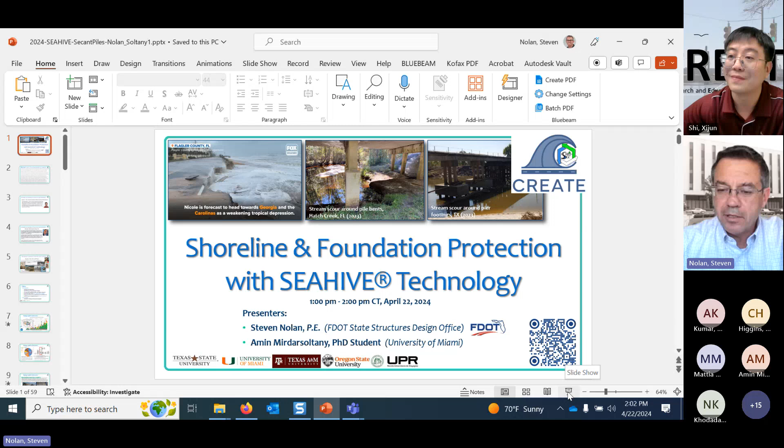So we're going to talk about shoreline protection and some foundation protection as well as it relates specifically to the C.R.E.A.T.E UTC project that's going on at Texas State. So as I was introduced, I work at Florida Department of Transportation. We have an innovative materials structures initiative that I've been leading for about the last 6 or 7 years. And so within that, we look at specific materials, FRP, UHPC. We're also looking at different structural forms. And so this is where the SEAHIVE unit comes in, something that I looked at originally, and then we passed it on to the University of Miami to develop, and now we're bringing in Texas State to look at some expanded applications.

So I hope you enjoy the presentation today, and a lot of it is background and motivation and generating thoughts and ideas about how to best combine technologies and structural morphology. So hopefully you'll get something good out of it. I can get my slides to advance. So we'll start, and after I'm completed, with a pre-recorded video.

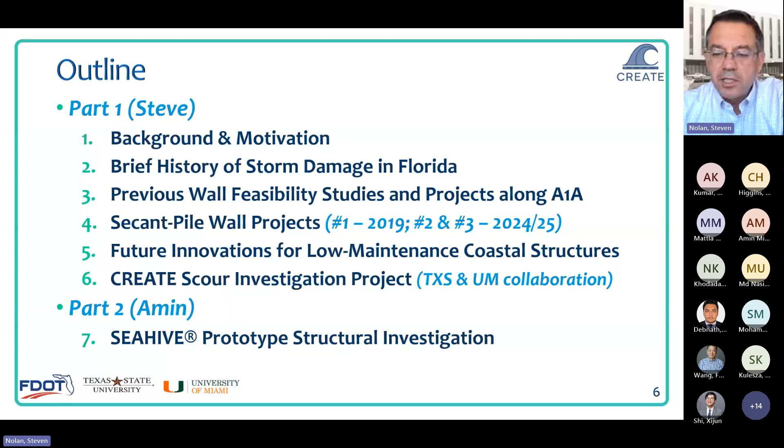Then we'll dig into some of the exciting developments that we're investigating, and we'll finish off with just touching on the initial scour investigation that's being conducted right now in Texas, and hopefully we'll have a follow-up presentation on that by the folks there later on in the year or early next year. And then at the end, we'll dig into some of the more specific structural investigations that have been conducted at the University of Miami that Amin's in charge of leading. And hopefully we'll have plenty of time for questions at the end.

But it's always good to ask why. Why are we doing any of this? And it's pretty obvious that the costs of these extreme events and moderate events are increasing. That's a factor of increased density of development along the coast, and then increased severity or frequency or both of storms and other weather-related conditions.

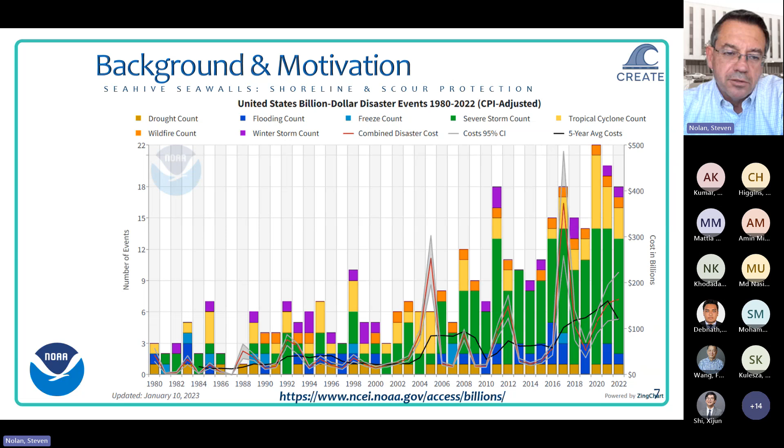And typically you get cyclic peaks and lows. It seems like 8 to 10 year cycles, and we seem to be in the middle of another one here. But if you look at the last 25 years, the cost has just grown significantly for the damage that's incurred as a result of some of these storms or floods or tropical cyclones. And as you'll see, a lot of it is related to water damage, whether that's from wave action, stream flow, or other related hydraulic events.

This map from 2022 shows the locations of all the different kinds of hazard disasters that have occurred. Should be pretty obvious what's most significant in what region of the country. In Florida, we're susceptible to hurricanes mostly, at least at this point.

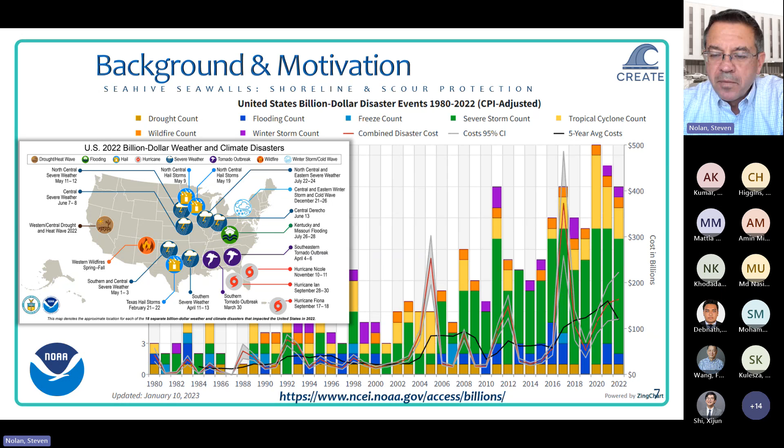So if we look nationally in the US at bridge failures or causes of bridge failures, at least half, and sometimes some studies quite a bit more, are hydraulic related. And so that's typically the result of scour or undermining of the foundations.

Looking a little more broadly, this study or survey by Zhang et al. looked at both the US and China and found similar trends there with the hydraulic events creating the majority of the damage to existing infrastructure and bridges more specifically.

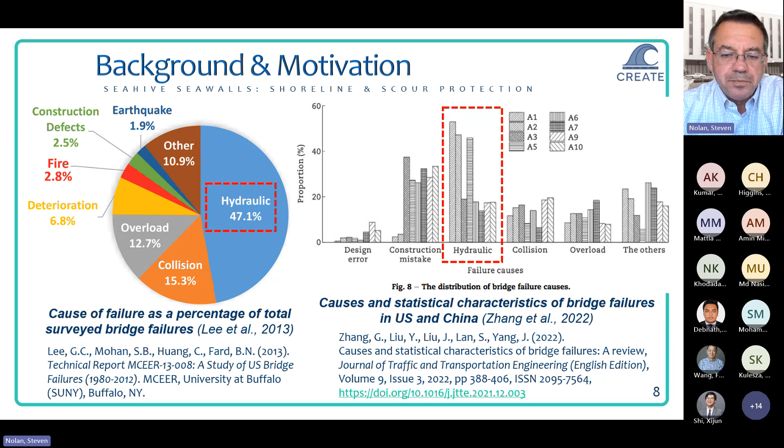So this was something just from a week and a half ago that caught my attention. When we look specifically at the coast or coastal infrastructure, highways in the case of A1A that we're going to be talking about today, the natural protection is typically the sand dunes, which are quite often removed during urban development for improvement of views or whatever. And so as we've grown to appreciate the advantages of these natural defenses, we've invested significant resources in rebuilding or renourishing the beaches and sand dunes periodically after a storm event.

But it's always, it seems, a never-ending battle in that the sand never returns in full back to the shoreline during the calmer periods, and so we're continually at risk of more and more damage. And that could be a function of a number of factors, whether that's increased severity of storm activity, whether that's a rising mean sea level. All these things sort of play a bit of a part into that.

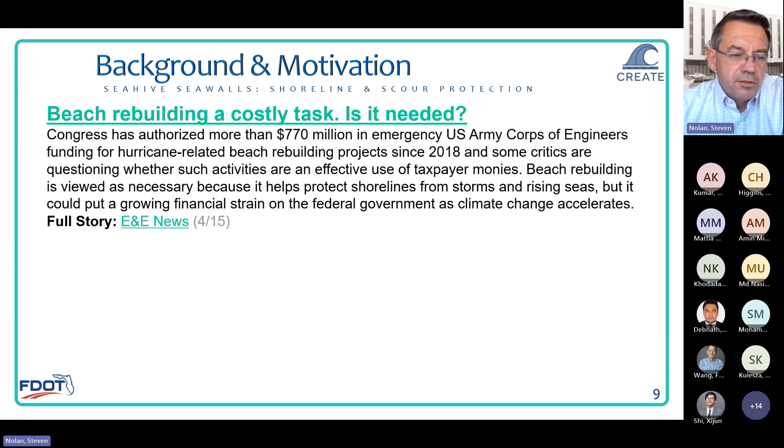And policy decisions too play into that for development along the coast, and insurance and reinsurance incentives. So it's a very complicated issue as to what the cause and potentially what the solution is. As engineers, we're tasked with trying to provide safe and efficient and effective infrastructure for the community, and so that's what we're focusing on here. Whether you're supportive of protective measures along the coastline or not, that can obviously be controversial in some communities.

But if we look at the northeast counties of Florida, St. Johns, Flagler, and Volusia, they've been subjected to quite a few storms in the last 20-25 years that's resulted in significant damage, and we seem to be replacing or repairing the highway every decade or so due to a major event. So most recently with Hurricane Nicole, it's not just the highways now that are at risk, and some of these large condominium complexes that are adjacent to the coast are starting to be undermined. You can see the piles hanging out at the bottom of that significant structure there.

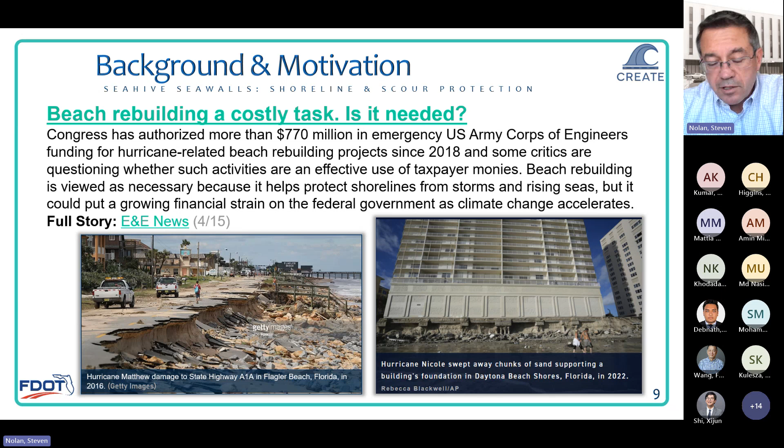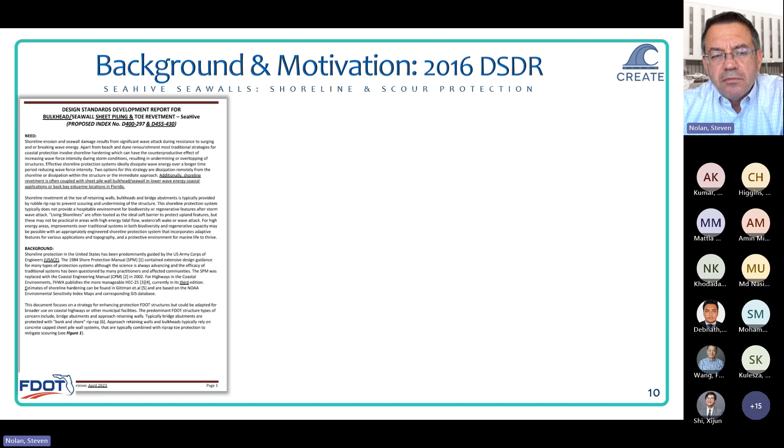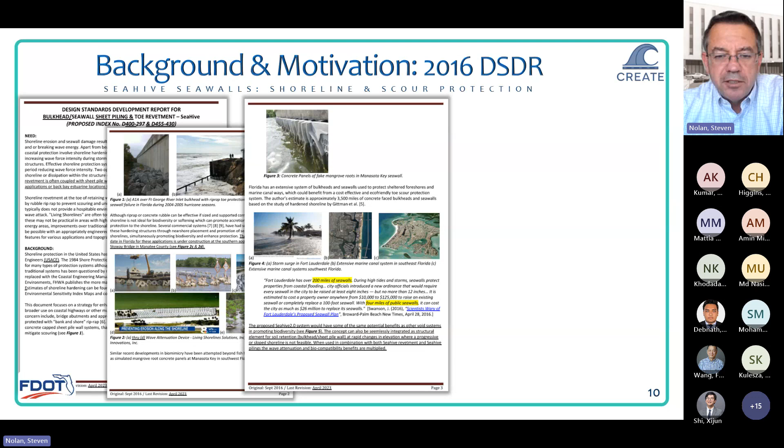So it seems like we're going to need some solutions to both balance the needs of the community for access and use of the natural resource of the beach, plus protection of infrastructure until we decide whether to retreat or some other activity. But we started looking at different protective measures back in 2016 and developed this what we call a design standard development report in the department. It's just the initial seed idea phase and gathering information.

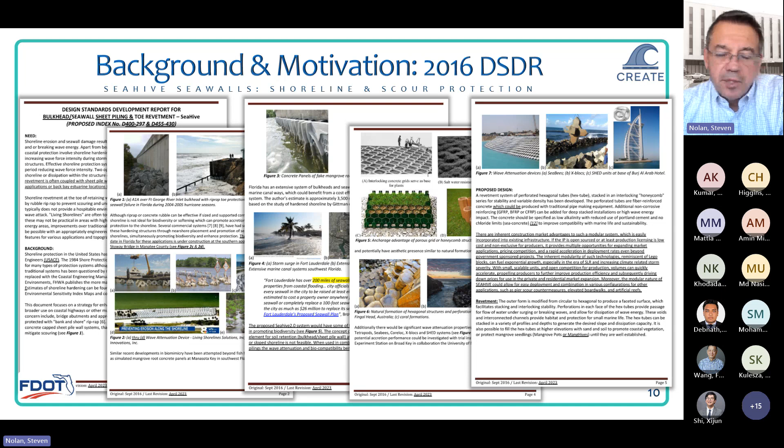There's quite a lot of attempts and different products out in the world that have been used over the years, and some of those work very well. Most of them are all proprietary and restrictive in their use, and none of them really seemed to fit the need of what we needed as far as scour protection for bridge abutments, retaining walls, and potentially intermediate piers and piles. So we sort of settled on this shape of the hexagon just because of the structural efficiency of it and the adaptability, like an interlock.

We looked at the potential for it being a substitute long term for rubble riprap. That's the go-to method of shoreline protection. The challenge in Florida is that we don't have heavy density rock. We have a lot of lime rock, which can be pretty robust, but it doesn't have the weight that sometimes is required with these large energy installations near the coastline. And so we're importing granite from Nova Scotia and maybe from Georgia.

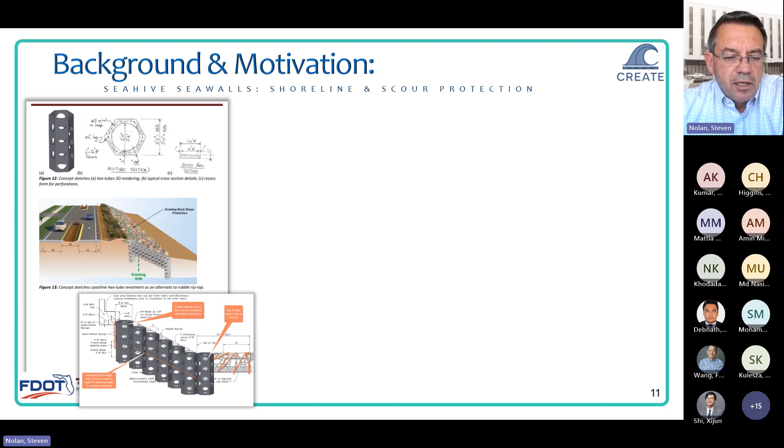And so that's not an insignificant cost. And so we're looking at some sort of modular system potentially that could replace that, be a little more efficient, both environmentally and structurally, and adaptable in the future. And so here's an example of where we would normally have a rubble riprap abutment and potential use of different hex-shaped modular structures to protect that.

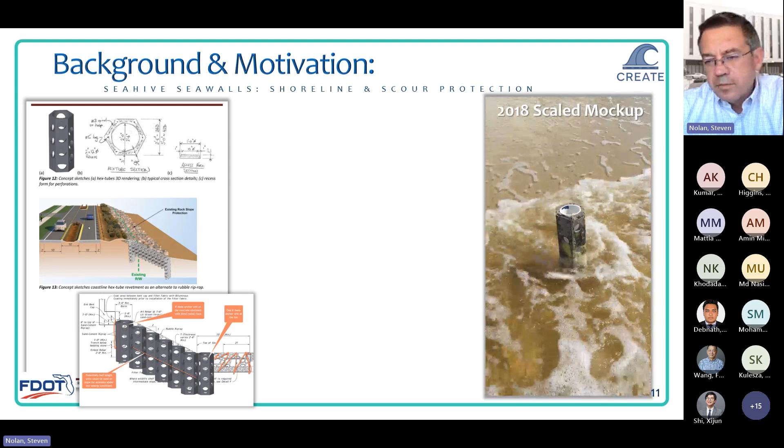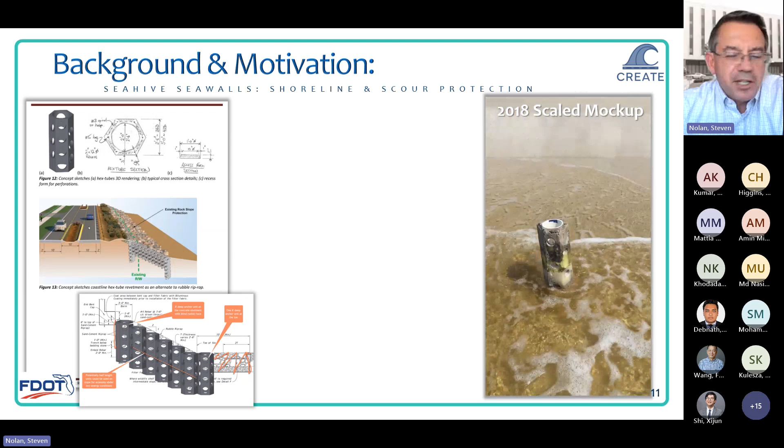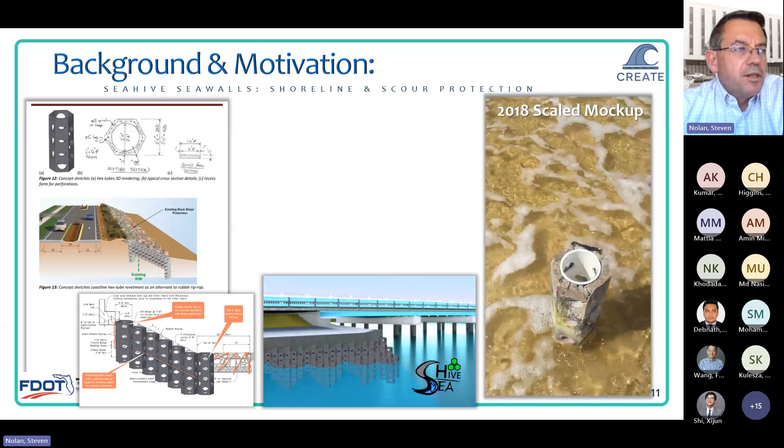So here's just a little scale mock-up that I built back in 2018, just as a concept, to see how the water flowed around it. Nothing very scientific about it, but it was a fun project just to see if this was something that was really worthwhile and practical. We had worked with University of Miami on a project looking at very durable materials, FRP specifically.

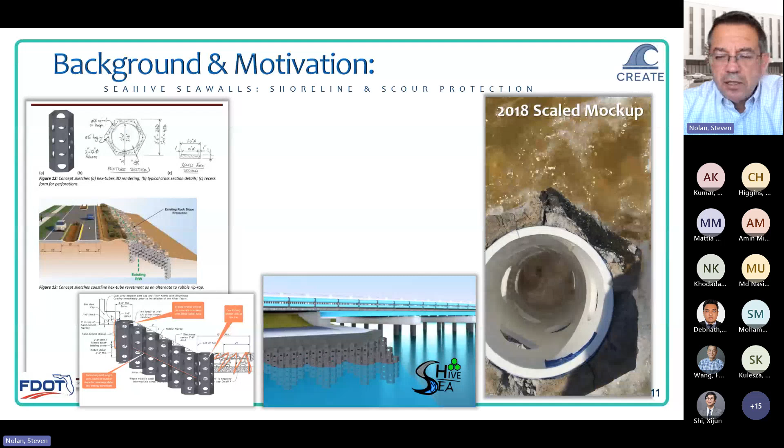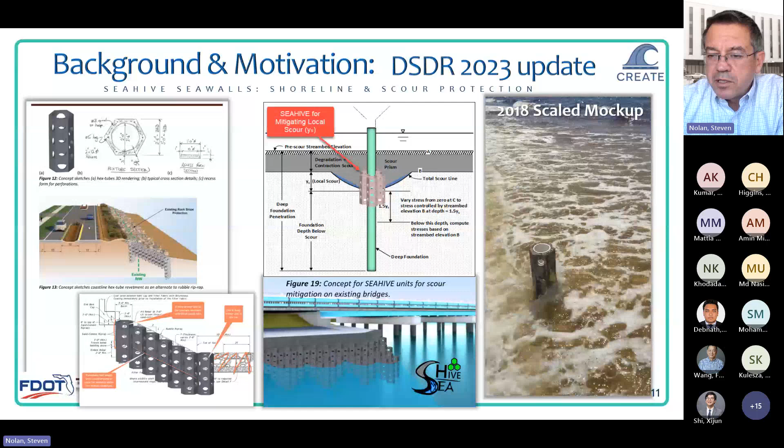And so as a follow-up to that project, we looked at some other adaptions that could be utilized in the future. And then most recently, we started to look at the scour of bridge piles and bridge piers, trying to develop something that might be capable of retrofitting an existing bridge to mitigate scour. So we're very early in that development phase, but you'll see as we get through this presentation a little bit more of what's been done to date.

So focusing in on Flagler County, after some significant storm damage, we invested money in hardening the right-of-way of the coastal highway. We didn't touch the beach and toe of the sand dunes, although they had been removed by the hurricane. This was motivated by Hurricane Matthew in 2016. As you will see, we've been looking at it for quite a while. It seemed to be a continual problem.

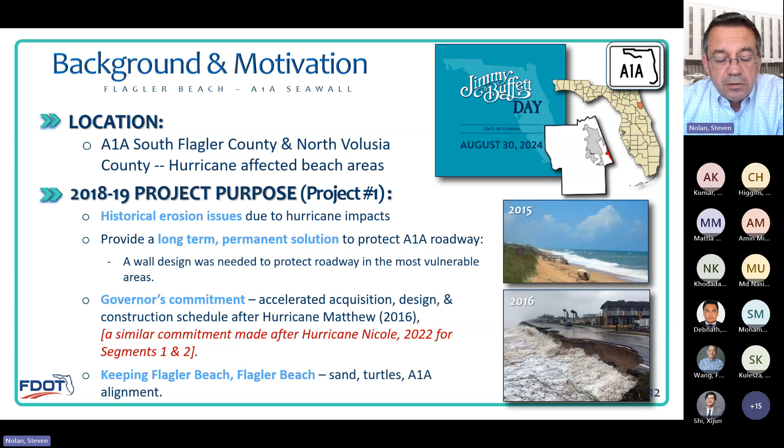Flagler County did not have a recurring contract with the Army Corps of Engineers for renourishment of their beaches, so that could have been part of the problem. But there's always a concern with any system of disrupting the natural environment, so there's always concerns about what effect this will have on sea turtle nesting and other habitat.

So there was a 1 mile section we will call segment 3 that was the most vulnerable to scour and had the most damage in the past. And so that's the section we initially focused on. There is a section to the south, segment 2, the majority of which had a federal renourishment project planned, and there were a lot of technical issues with getting rights of way to do that work. And so it's been held up. I think it's just about to start.

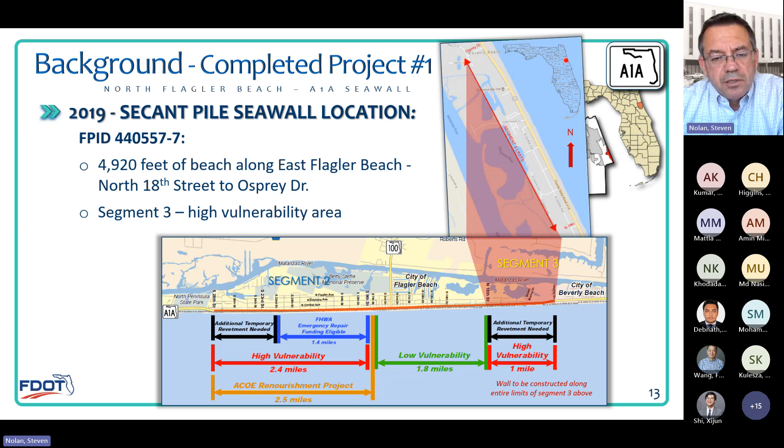It's been like 5 years, and that is indicative of some of the challenges if you're going to rely on a renourishment program. You need to have all the agreements in place to be able to do that and reliably come back after a severe event to maintain protection.

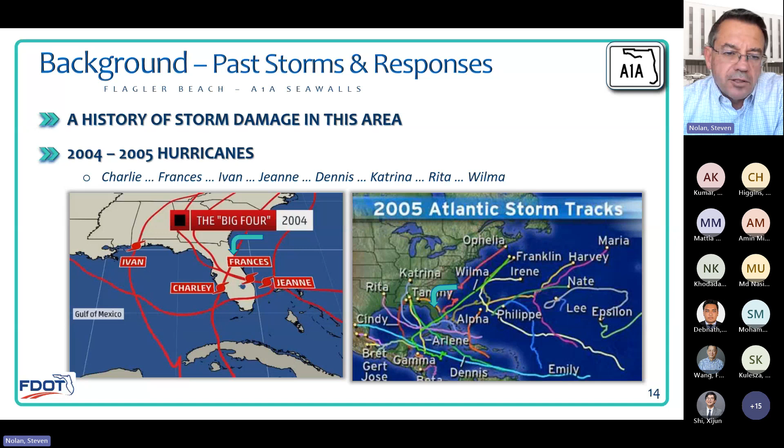So going back to the beginning of this century, we had a pretty severe storm season in 2004, 2005. 2004 was worse for Florida than 2005. That was Katrina. But during that period, there was significant erosion along the coast and damage to Highway A1A.

I don't know if you can hear that background noise, but I hope it doesn't bother you too much. I have a landscaper outside right now.

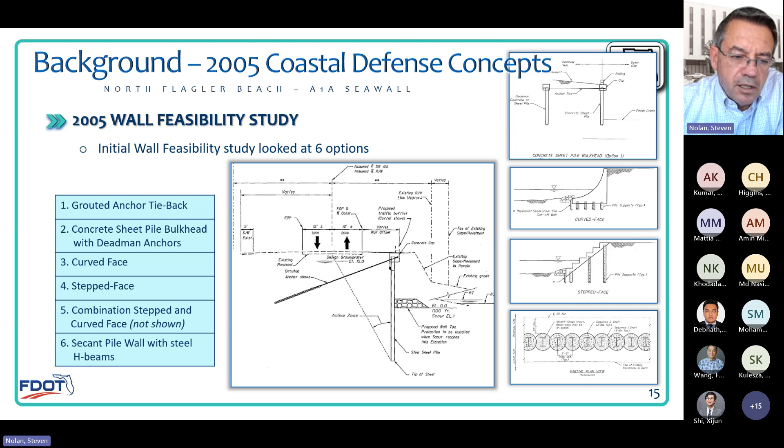We looked at 6 different options for protecting the shoulder of the highway there, just behind the sand dunes. All of them pretty much traditional retaining wall systems. The secant pile wall was really the last one; the building industry is very familiar with it, but we hadn't used it a lot in civil infrastructure construction. And that particular system they looked at then had a steel H pile in the middle for reinforcement, which ended up not being the reinforcing option that we chose.

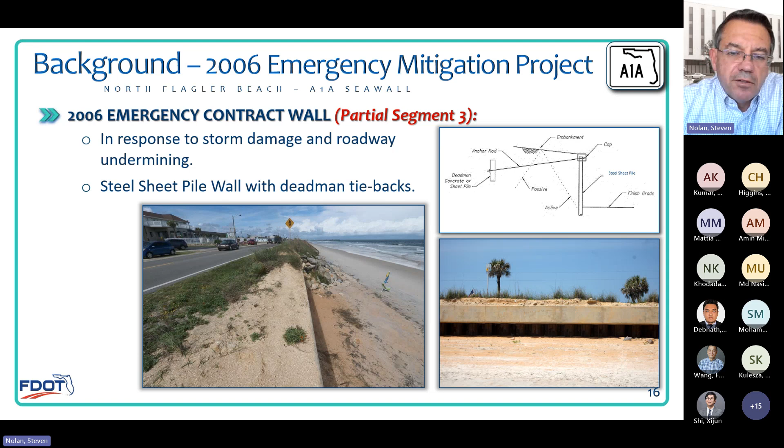Because of the severity of the storm season in 2005, there was an emergency contract, so they went and built a short section of steel sheet pile wall with concrete cap, tied back. You can see there in the top right. This was I presume intended to be a somewhat temporary solution, 20, 25 years. I don't really know the full details and the motivation, but it provided a great opportunity for us to go back and look at the durability of sheet piles in this type of environment, to see if it was viable to design these systems with sacrificial thickness.

It was quite surprising, though, the amount of deterioration that we saw in the first 7 years. Partially, I believe, because the abrasion of the sand accelerates the corrosion beyond just the concerns with the constant wetting and drying in the chloride environment. And so we have corrosion rates established for aggressive environments, but they're not really anticipating this type of application.

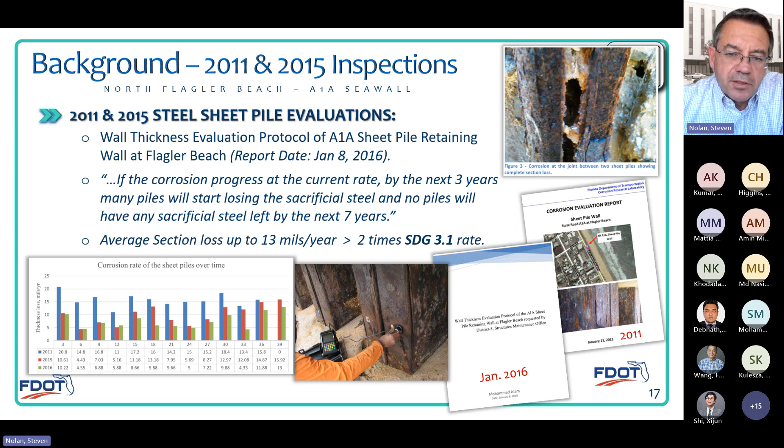And what we found was the corrosion rates locally were more than twice the worst case we predicted in the past. So the microenvironment is very critical to the use of some of that guidance that's out there in our structures manual and other engineering documents.

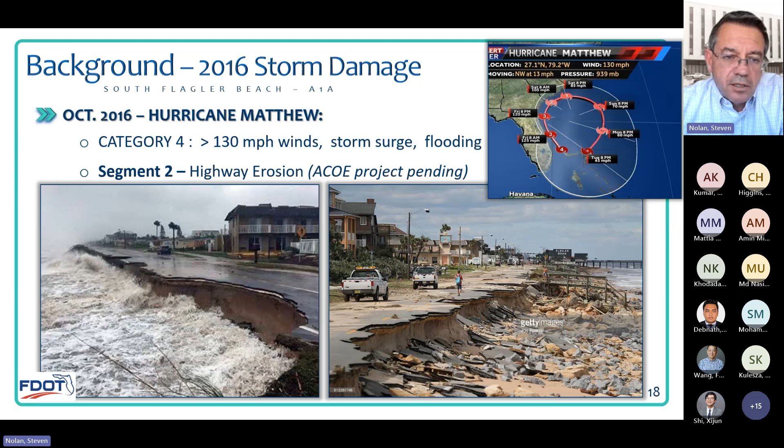So moving ahead 10 years, Hurricane Matthew came through. That was the next biggest storm, and it did a lot of damage along the coast. As you can see there, some pretty impressive erosion of the highway, significant disruption to the community. This is the main access route along that section of the coast for businesses and evacuation. So it was a concern to the state of Florida that this seemed to be occurring more frequently.

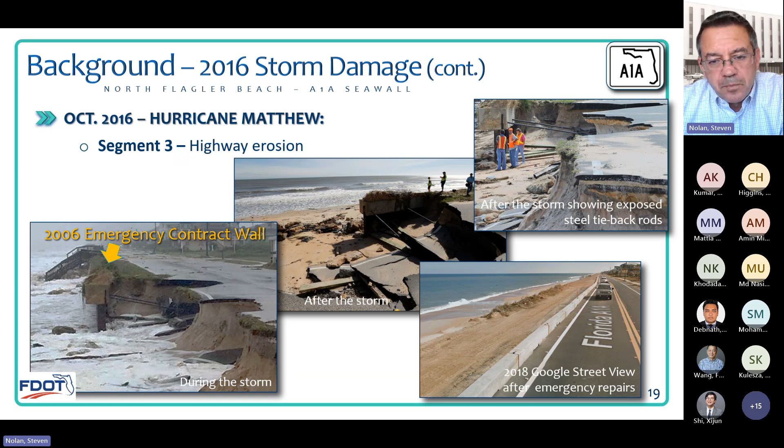And if you look back at that steel sheet pile wall that we talked about earlier, you can see there that it's totally exposed at the end, and essentially that had to be removed. So the project that was designed was a secant pile wall for segment. It says segment 1, but I think it's actually segment 3. And segment 2 was unprotected, which was a little bit to the south.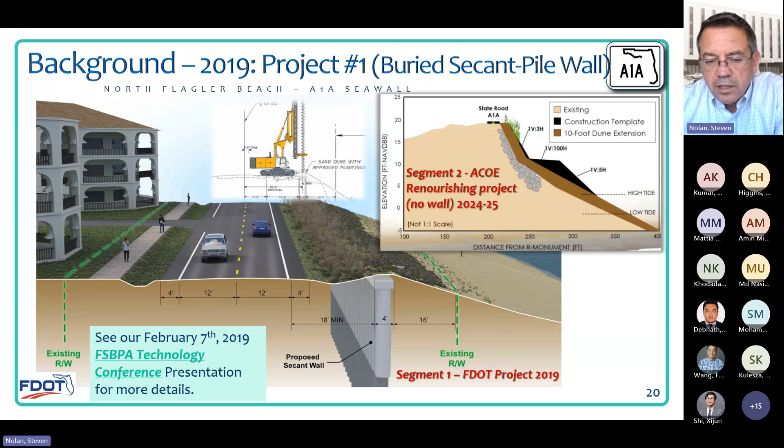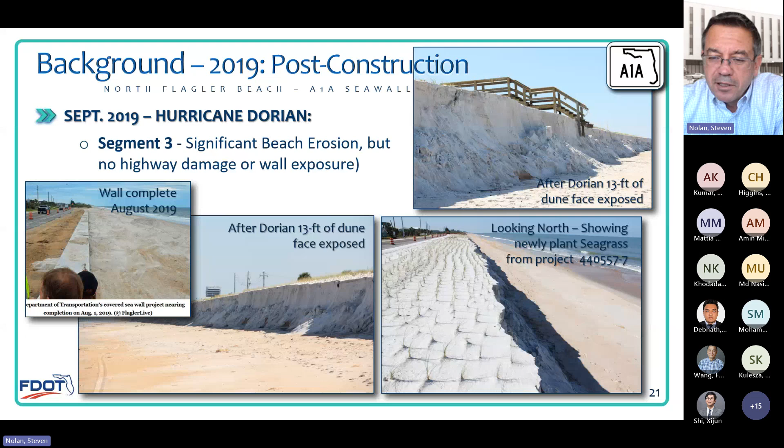And so we had like a 1 mile secant pile wall that was eventually buried by sand dune and revegetated, which we presented in the 2019 Florida Shore and Beach Protection Association tech conference in St. Augustine. So there's quite a few details on that available there. The project was finished in, I think, August. And then in September, we had Hurricane Dorian come through and erode most of the sand that we had placed or replaced after completion of the project, probably 75%.

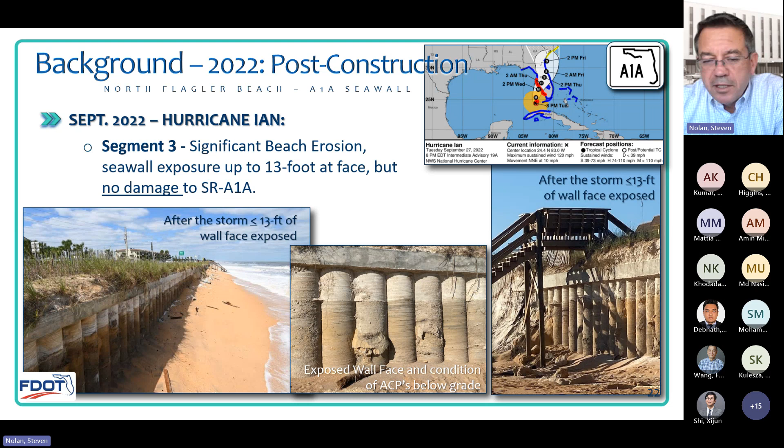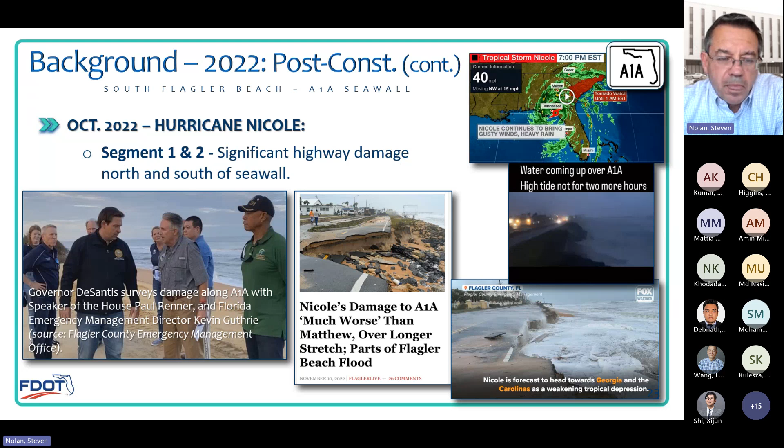There was another storm in 2020, not as significant, and then in '22 we had Hurricane Ian that really did some damage along that coast, but the secant pile wall stood up well. You can see all the vegetated sand dunes on top remained in place, and no damage to the highway. The section south of that that wasn't hardened with the secant pile wall had significant damage again. Looks very familiar to the previous scenarios, and so the state was charged with expanding that protection that we currently provided.

Here's some more photos. Hurricane Nicole, that was a month later. It didn't necessarily scour any more sand away from the base of the wall by the end of the storm, but it did damage areas to the north even more significantly, where there was no protection. So the wall did its job and allowed the county to go back and replenish with sand once they got the permits. But as I said, that takes quite a while, and it's not going to happen probably for another couple of years.

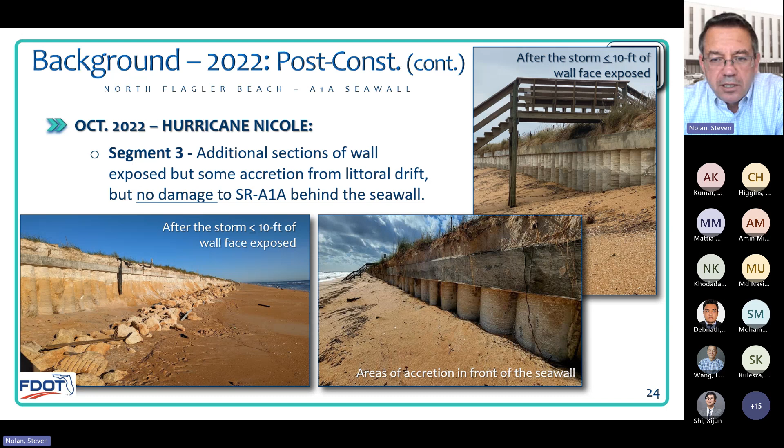When we go back, all this rubble that you see at the toe of the wall there, that wasn't part of the last project, that was previous attempts to protect the highway. And so that sort of obstructs what remaining beach there is. And so as part of the designs we don't use rubble as toe scour protection, just because of the residual concerns.

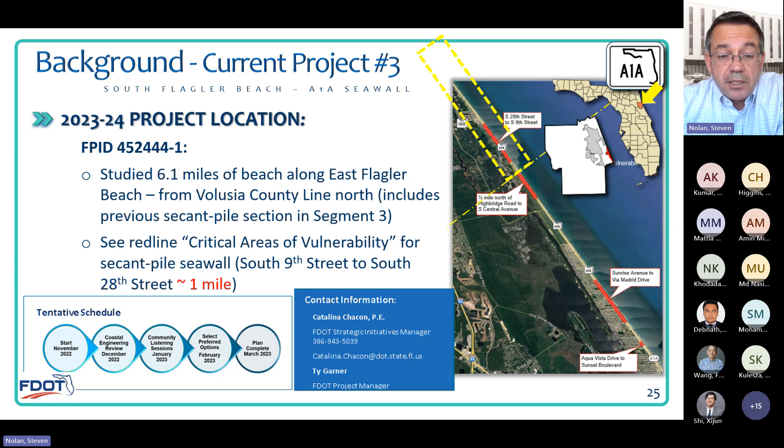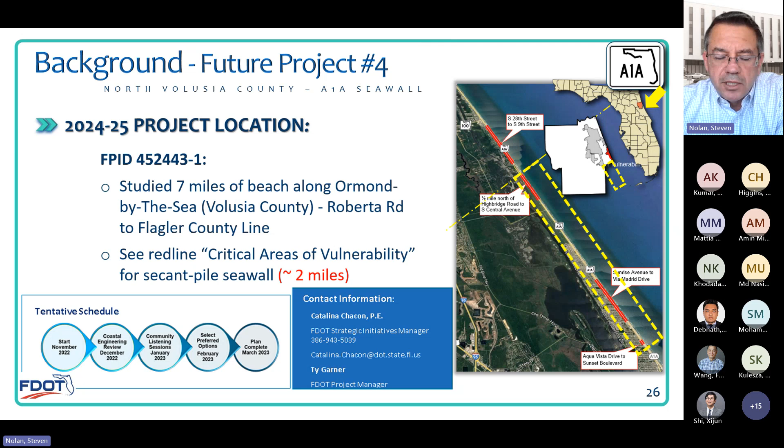So looking at these projects for this year and next year, it's about a mile to the south of the first project, which we call project number 3. Project 2 was the Army Corps of Engineers. And so this is completed design, and is about to start construction. And then there's a section to the south of the county line there in Volusia County. It's about twice the length of coast, 2 specific areas with a similar system, and we'll look at some of the details. They both use secant pile walls.

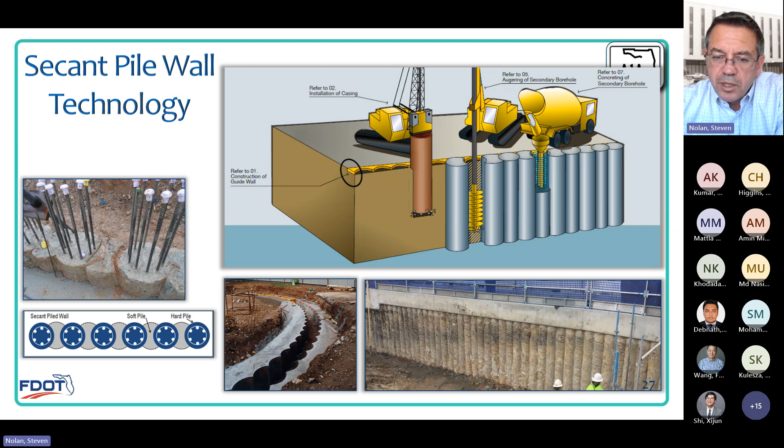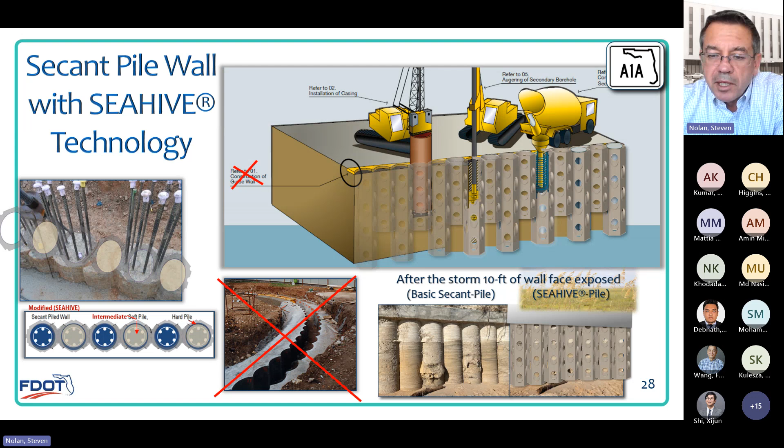This is the original technology that came from the building industry that was utilized effectively in the first project. There's plenty of information out there that you can access. So this is a concept we're looking at for improving the efficiency and the economy of the secant pile wall by incorporating precast casings in the hexagon form, and potentially supplementing that with units at the toe to reduce the amount of scour or recharge the sand as the storm encroaches on the wall.

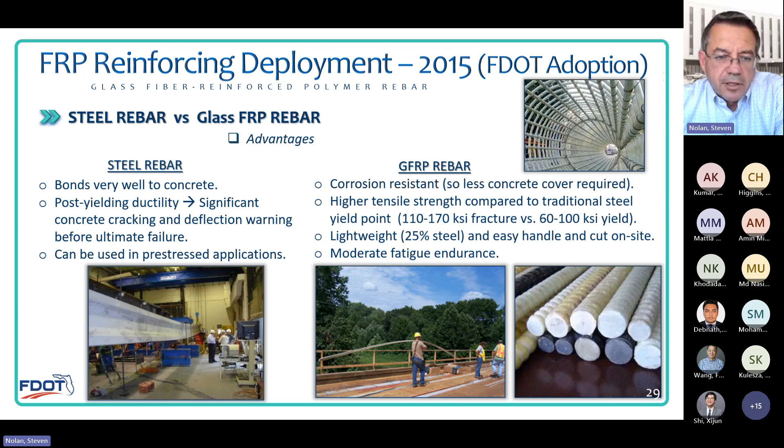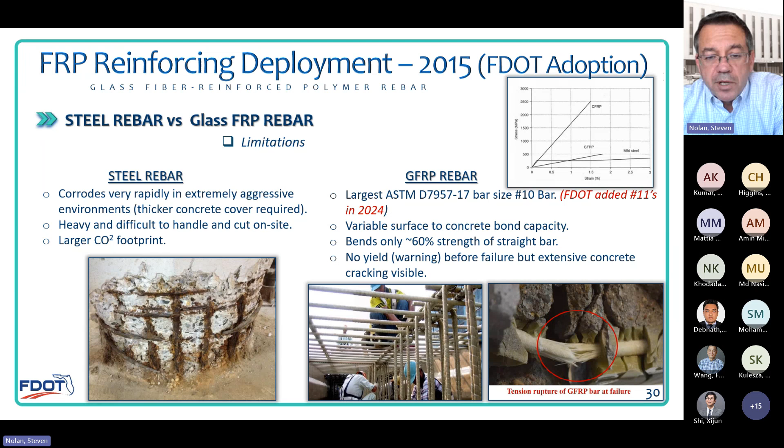Originally, these projects were envisioned with steel rebar, but as the department moved towards the use of FRP, we were able to incorporate glass rebar, GFRP rebar for short, into those projects. There are significant advantages of both listed on the screen there, but the main motivation really is durability and to eliminate corrosion. There are limitations also with both steel and GFRP, and so being able to work with those limitations is part of what we do.

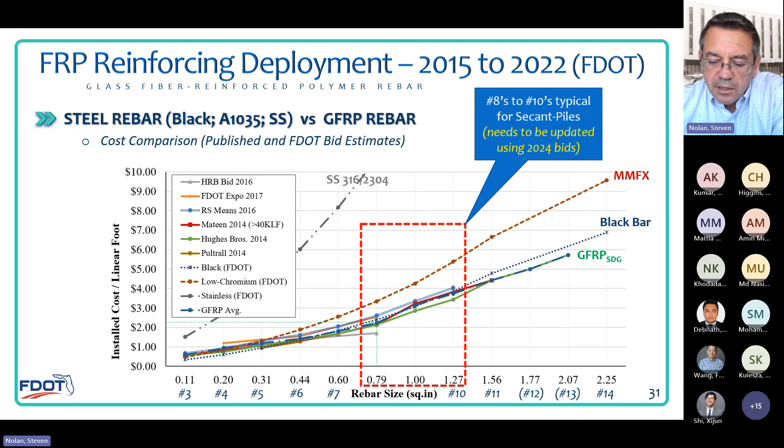The costs are more, let's say, for FRP than they are for plain carbon steel. Those cost differentials tend to reduce as you get to more expensive alloys that are more corrosion resistant, and significantly less than stainless steel, which would be similar in its durability performance. But what we are finding is that as you get to larger and larger bars, the cost differential tends to go away, and so we're also looking at this for other applications.

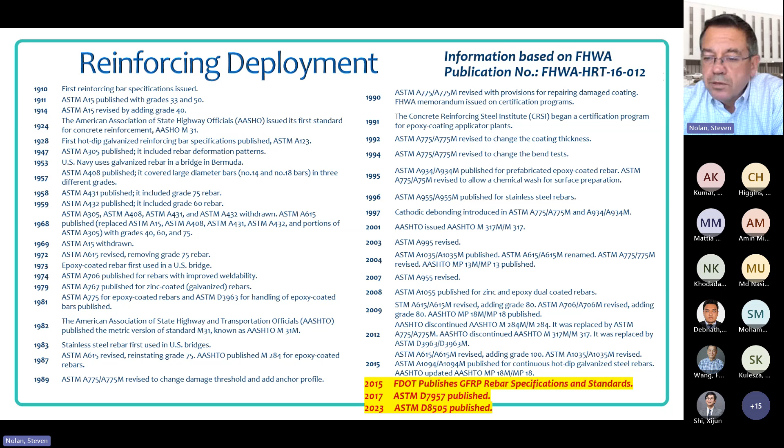It really only got approval in 2017 under ASTM, and there was an update last year to a higher modulus specification, which adds some advantages to us to improve the economy of these structural systems. So back when we were looking at the first project, those were the costs of the steel rebar versus the GFRP.

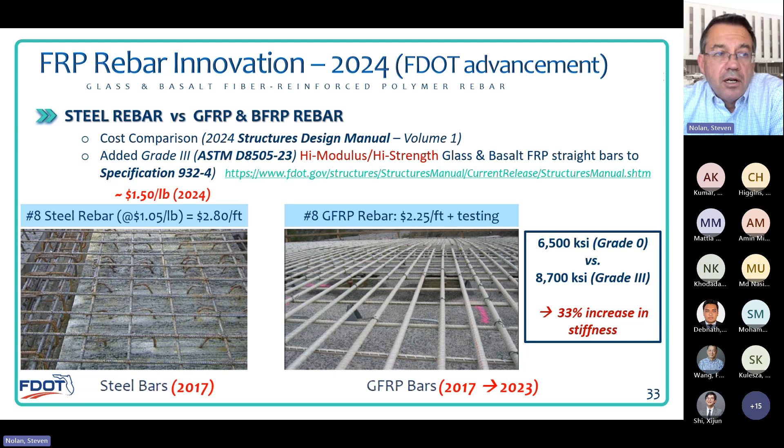With today's market limitations, the cost of steel rebar has increased significantly. It fluctuates quite a lot, though; this is an in-place cost from the contractor. That's always a moving target. But the important thing that did happen between the first project and this next project was the release of a high modulus, high strength specification. So we're able to reduce the volume of GFRP rebar.

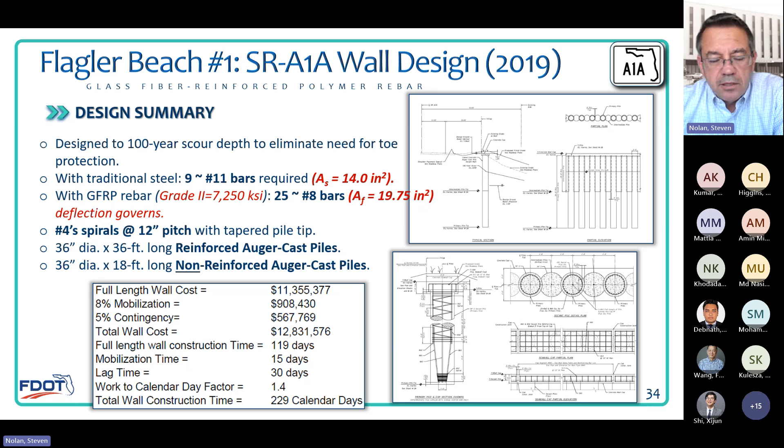This is a lot on this slide, but basically it's just a comparison of a traditional steel reinforcing design with a GFRP one. You can see the area of reinforcing goes from 14 square inches to almost 20, a significant increased area required, and that's mostly due to the stiffness, not the strength of the reinforcing. We have limitations on the deflection that these wall systems can have to avoid damage to the highway shoulder. So as the FRP rebar properties improve, stiffness and strength, that's really going to help drive down the costs.

So if we look at the next project, the one at the southern end of Flagler County, the designer has a slightly taller wall there, and so the actual design ended up being 28 square inches, a little bit more due to deflection. As we started looking at the project and the next project to the south, with the release of the ASTM with high modulus, high strength rebar, we encouraged the design-build team to consider using the newer specification, which was not necessarily in their original contract. And so they've taken a look at that.

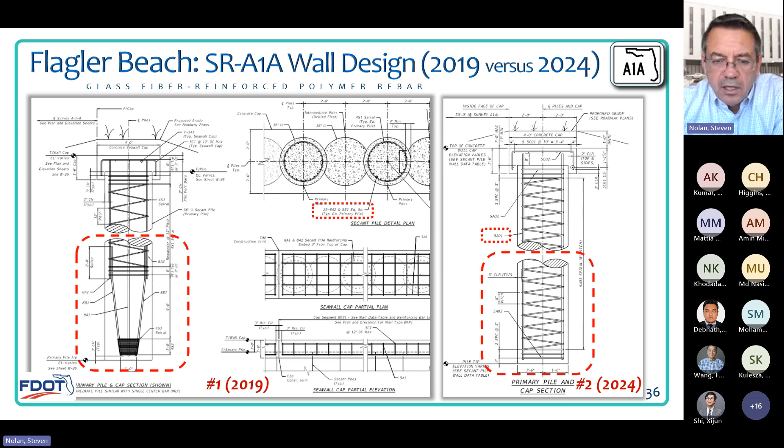You'll see in the third project that they're actually reducing the volume or cross-sectional area of reinforcing required in the secant pile. Other differences between the first and the second and third projects: the tapered toe was found to be unnecessary and expensive, so we've eliminated that. There is an increase in the area of stirrups, again related to some of the changes in the design specifications.

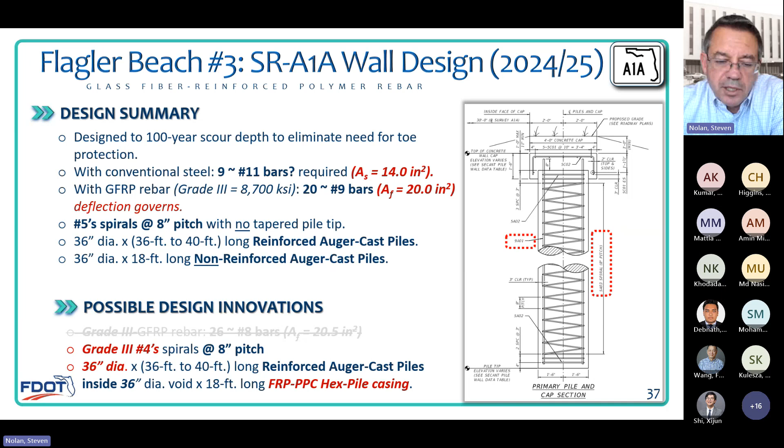But the last project is really Volusia County, not really Flagler Beach anymore. There we're able to go back down from 28 square inches to 20 square inches using the grade 3 high modulus reinforcing. That's a pretty significant 30% reduction, thereabouts, in reinforcing. So as we improve these standards and the manufacturers show us what they can do, we are able to take advantage of that.

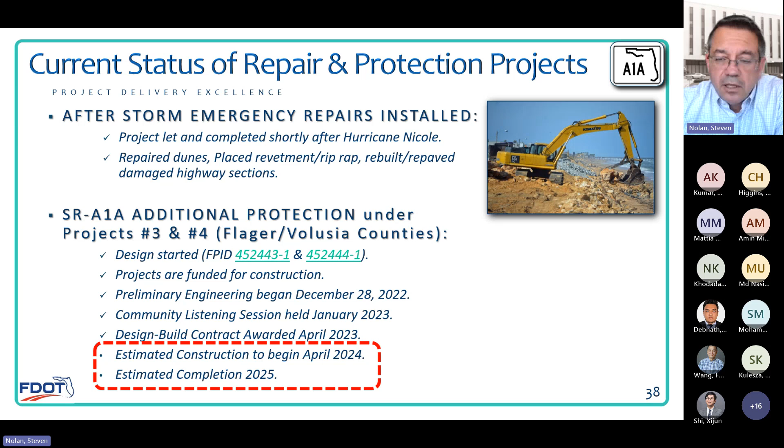So the project design is now complete. Tomorrow is pretty much the final comment on the final plans, and construction on the southern Flagler Beach section will begin. So we look at the existing design, the new design, and then potential enhancements using other precast accelerated construction methods.

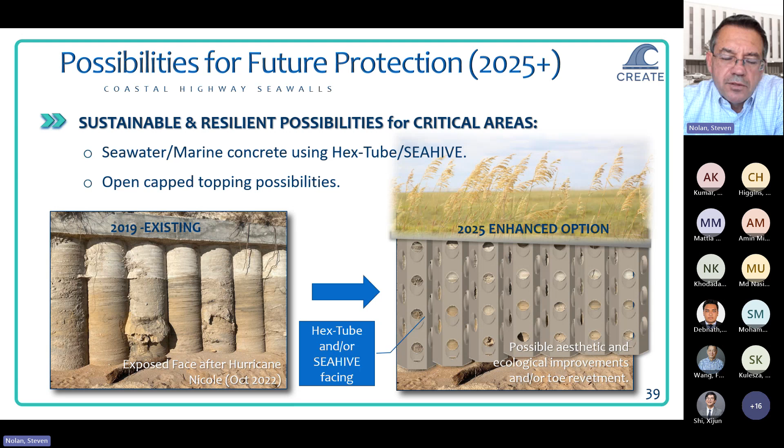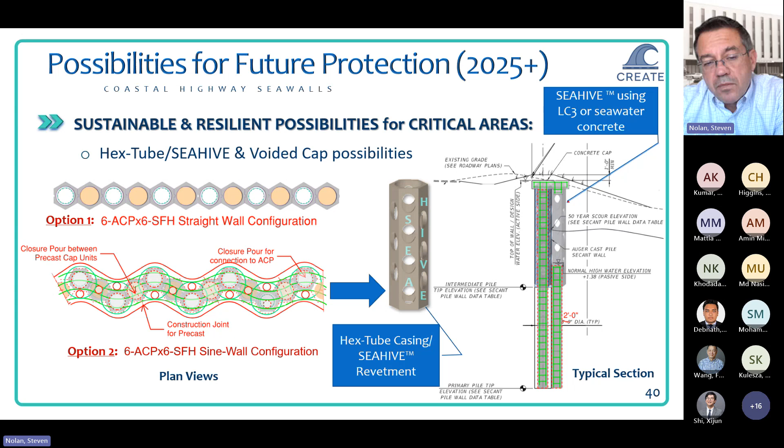We're looking at adaptations of SEAHIVE to this system, and depending on the structural demand as the wall height gets higher, there are ways to reconfigure these hex shapes into two-dimensional walls to improve the structural efficiency, like a sine wall, which is a specific wall type that is available. That's the beauty of these hexagonal shapes: you can do a lot of different reconfigurations.

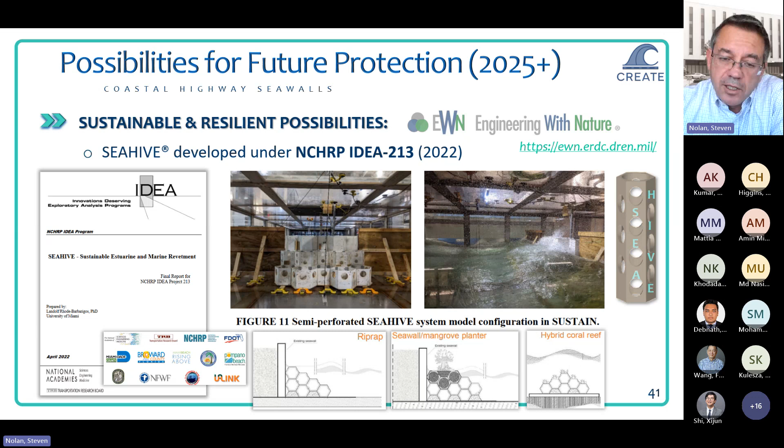Looking back at some work that was done for a scour investigation, it was really wave attenuation we were looking at in this project, NCHRP IDEA project number 213, led by the University of Miami. They did wave tank testing to look at the wave attenuation possibilities with different configurations and different amounts of perforation.

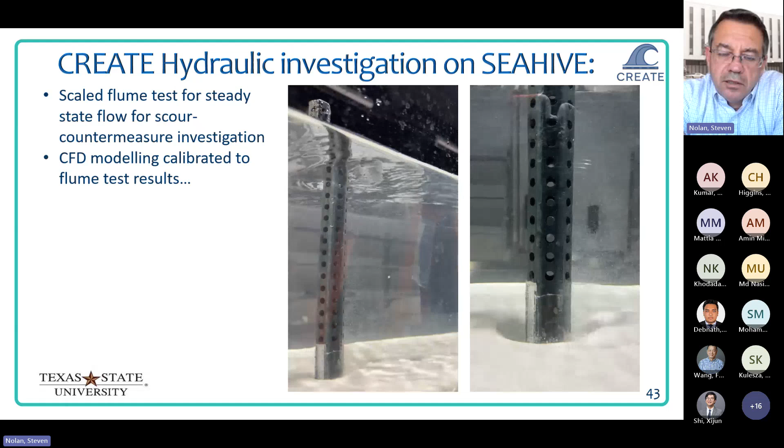Most recently with the C.R.E.A.T.E UTC, we're looking at potential applications for scour mitigation of bridge foundations. This is some initial work done at Texas State, looking at a single pile in the flume. Not surprisingly, they found there really wasn't much benefit in this single configuration compared to a circular pile. In fact, it actually scoured a little bit quicker, perhaps because of the jetting effect of the holes.

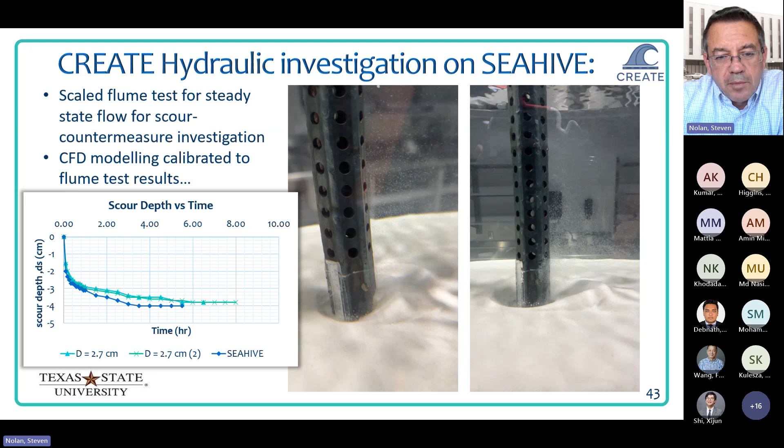Really needs a little bit more investigation to be done. There is some computational fluid dynamic modeling work that's also being done parallel to this to look at trying to optimize the system, but the real test will be when you start looking at multiple systems. So that's it for my section.

We're going to go ahead with Eamon's section here and looking at some structural testing at University of Miami.

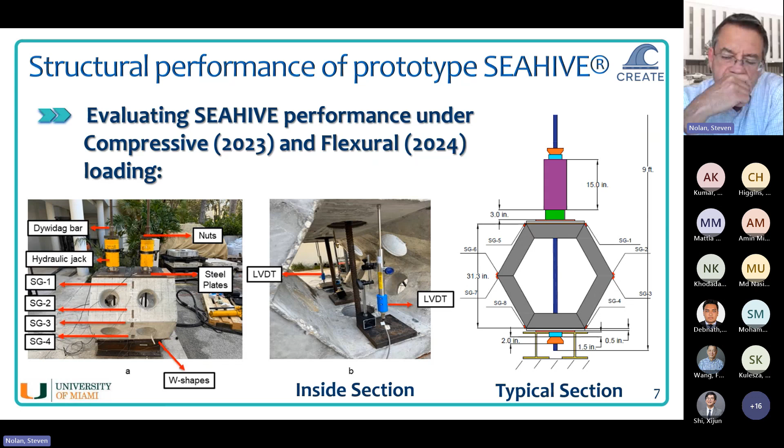For measuring the strain at the different locations, we use 8 different strain gauges, and moreover, we use 2 LVDTs at both ends of the elements to capture the displacement when we apply the compressive load on the elements. As you can see in this slide, we used 2 steel plates on the top and bottom of the elements to apply the uniform compressive load on the SEAHIVE elements, and we used 2 hydraulic jacks for applying the load.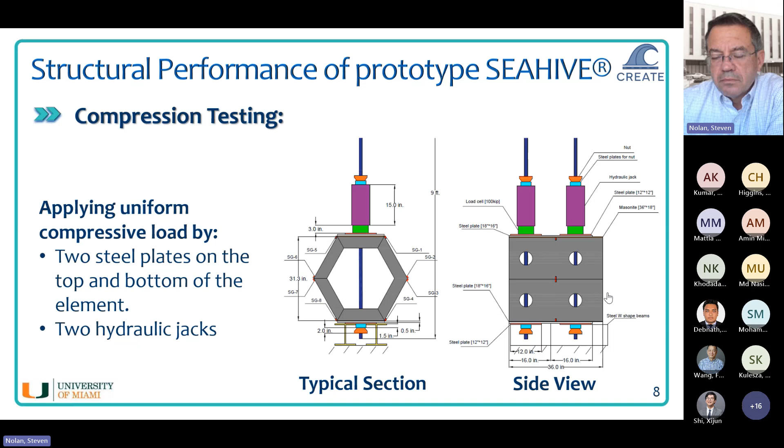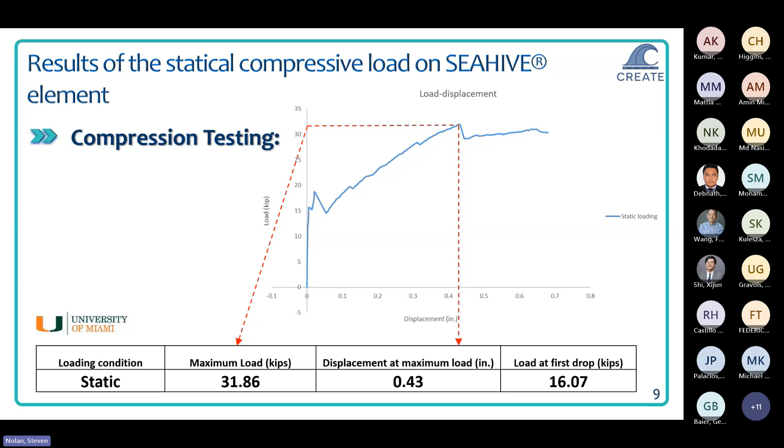This is the result of the static compressive loads on the SEAHIVE elements. As you can see, maximum load reached about 31 kip, and the displacement at the maximum load is about 0.43 inches, and the cracks started to initiate at the load of 16 kip.

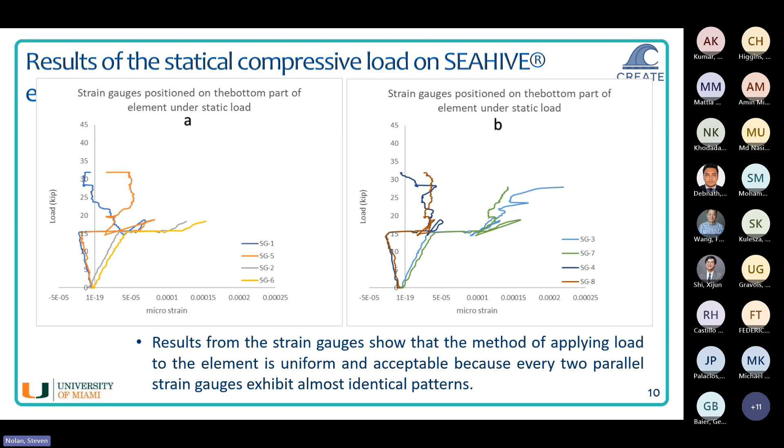This is the result of strain gauges. As you can see from the result of the strain gauges, the method of applying the compressive load on the element is uniform and acceptable, because the pattern of the strain gauges that are parallel together in the cross section are almost identical.

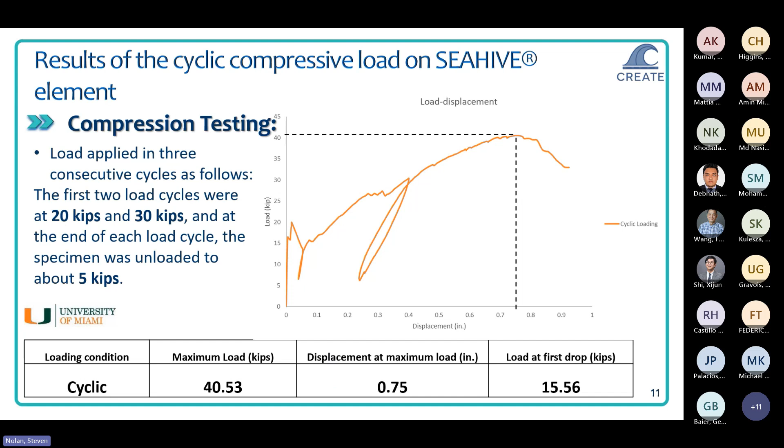Apart from the static compressive load, we did some cyclic compressive loads on SEAHIVE elements. The result was almost the same. The maximum load reached about 40 kip, and the displacement at the maximum load was about 0.75 inches. Moreover, the cracks started to initiate at the load of 15 kip.

Apart from the compressive loads, we did some static flexural load and cyclic load on the SEAHIVE elements. We used two hydraulic jacks for applying the flexural loads on the elements, and we used steel knives on the top and bottom of the elements. For capturing the displacement, we used two LVDTs in the middle of the elements on each side,

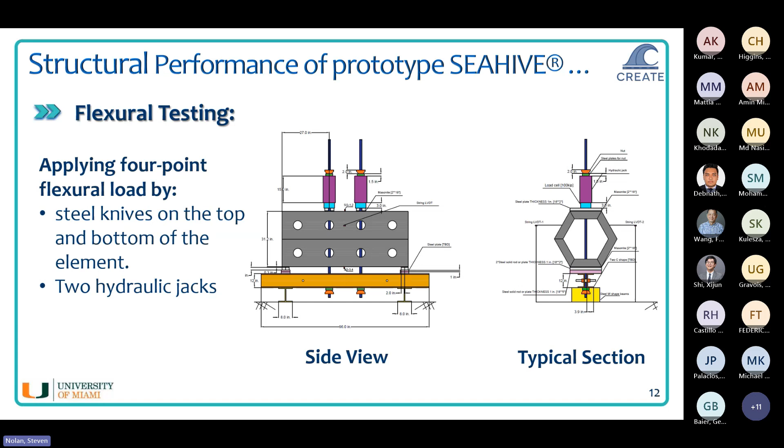and for the strain gauges at the different locations, we used two strain gauges on the top of the elements and two strain gauges on the bottom of the elements to capture the maximum compressive strain and tensile strain when we applied the flexural load.

This slide shows the pattern of the failure after applying the static flexural load, and the results show that cracks started to initiate at 17 kip, and moreover the ultimate load was about 60 kip when we applied the flexural load on the elements. It should be noted that both loads represent the total load of the two jacks when we applied the load.

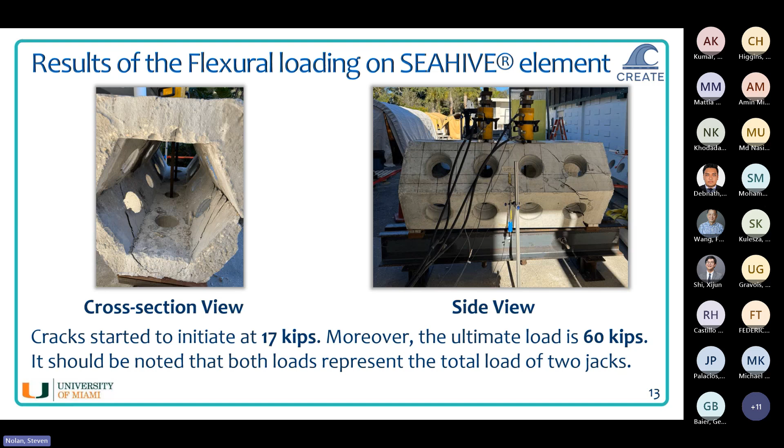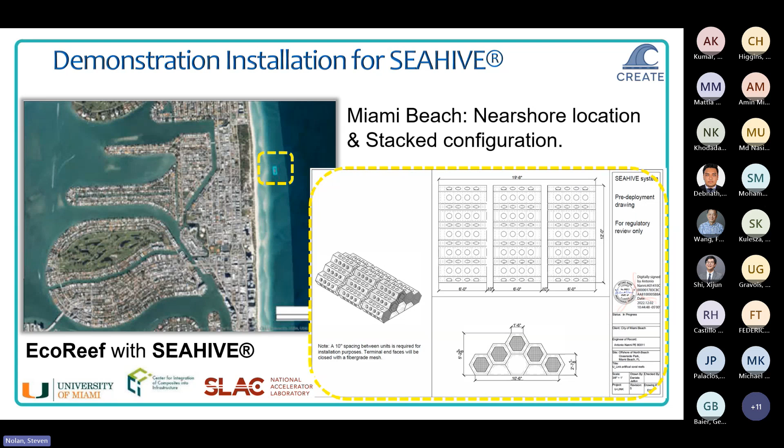This slide shows the implementation of the elements on Miami Beach and the spacing between the elements and units. And these are some pictures; we used these units in Miami Beach in March 2023.

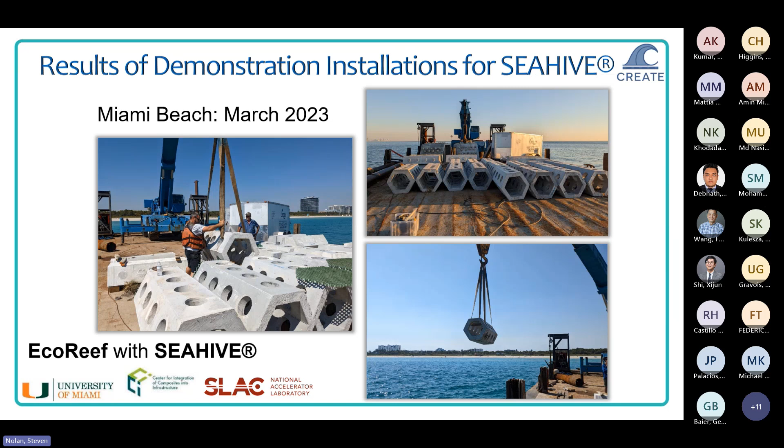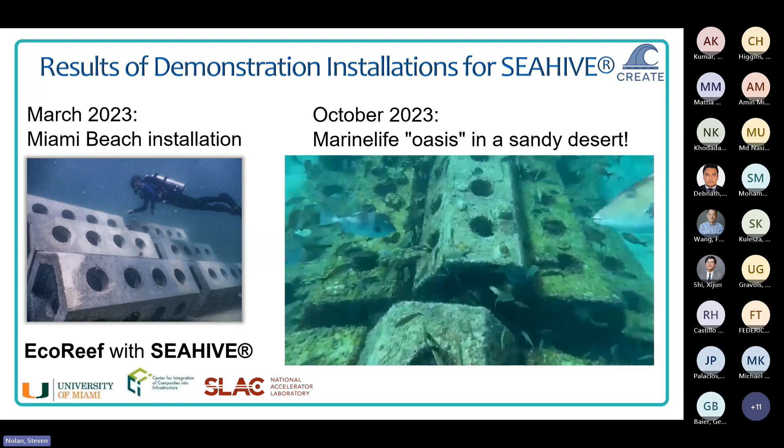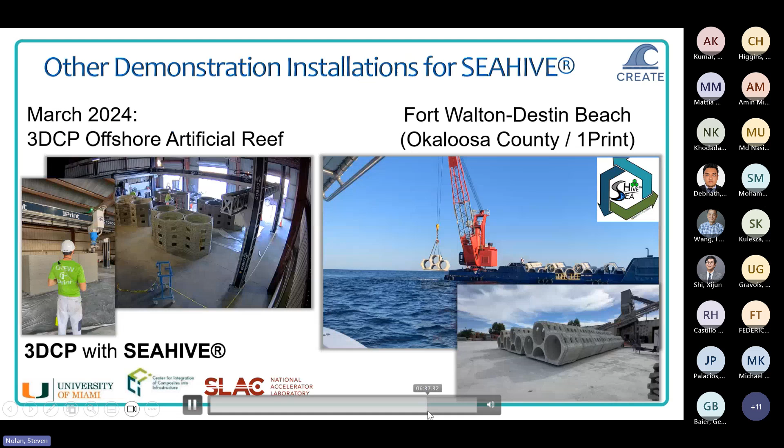Sorry, there was some dead space in the middle of that.

And this is the future investigation on the SEAHIVE. We are going to extract some cores for conducting quality control and quality assurance on the fabrication of the elements. We are going to extract cores on SEAHIVE, providing the compressive strength of the concrete used for the fabrication of the SEAHIVEs, and moreover performing ultrasonic pulse velocity on the extracted cores. In addition, we are going to measure the density of the concrete cores and evaluate the bulk resistivity on the extracted cores.